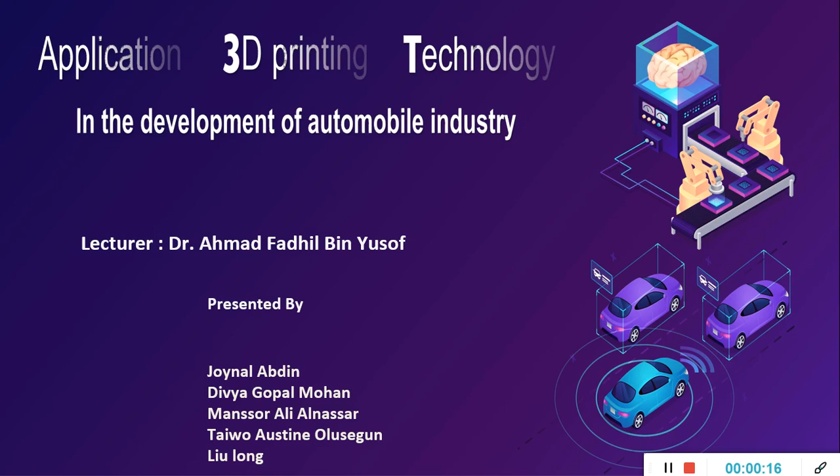Today we are going to present about the application of 3D printing technology in the development of the automotive industry. Contents: what is 3D printing, history of 3D printing, application of 3D printing, future of 3D printing in the automotive industry.

3D printing. Additive manufacturing, known as 3D printing, is a digital manufacturing technology that directly forms three-dimensional complex structures by simply adding material layer by layer in two dimensions. It will have a profound impact on the traditional process, production line, factory model, and industrial chain combination. It is a representative disruptive technology in the manufacturing industry, integrating information network technology, advanced material technology and digital manufacturing technology, and is an important part of the advanced manufacturing industry.

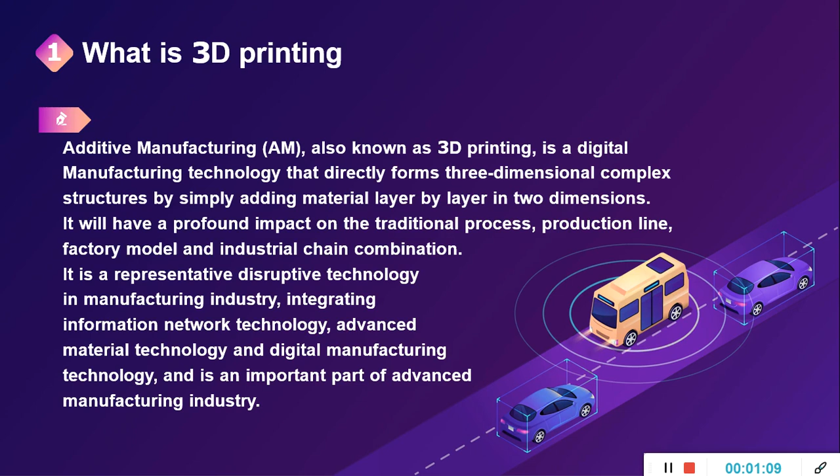The essence of 3D printing is additive manufacturing technology supported by computer aided design, big data, cloud computing, computer aided manufacturing, Internet of Things, virtual reality, and other technologies. 3D objects are directly formed by digitalization or computer models by stacking them layer by layer. To put it simply, 3D printing is a technology that constructs objects by printing materials layer by layer with extremely thin thickness through computer modeling.

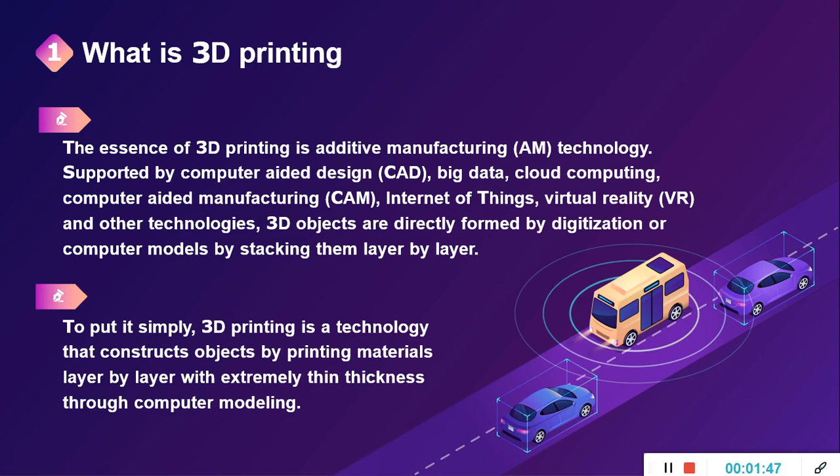History of 3D printing. In 1986, the birth of the 3D printing machine in the United States opened the curtain of the development of 3D printing technology. And in 2010, the world's first 3D printed car, a 6.1 model named Urbee, was unveiled. In 2013, the first prototype Urbee2 was born with more than half of its parts 3D printed. And in 2014, the first 3D printed electric vehicle, the Strati, has just 40 parts and was printed in 44 hours.

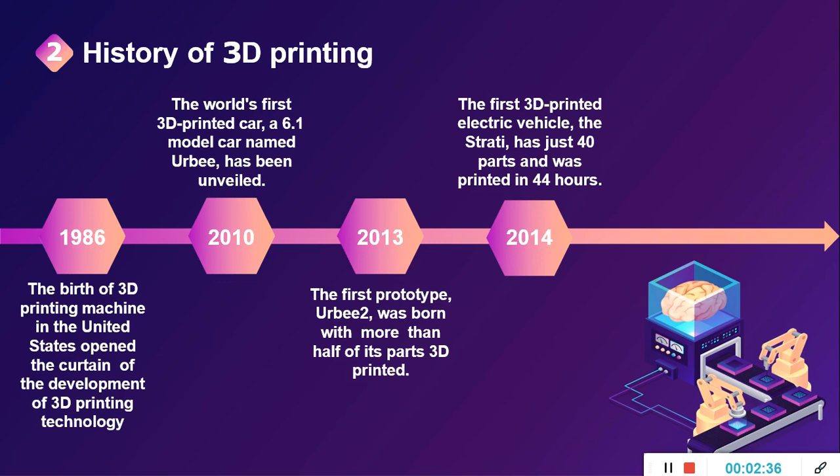And in 2015, US company DM created the world's first 3D printed sports car, the Blade, which uses 3D printed car parts and is then assembled by hand. Here is the picture of the 3D printed Blade car. And in 2016, 7 of the world's biggest car brands unveiled their latest designs as 3D printed concept cars hit the market. XEV designed the world's first mass-produced 3D printed electric car in 2019.

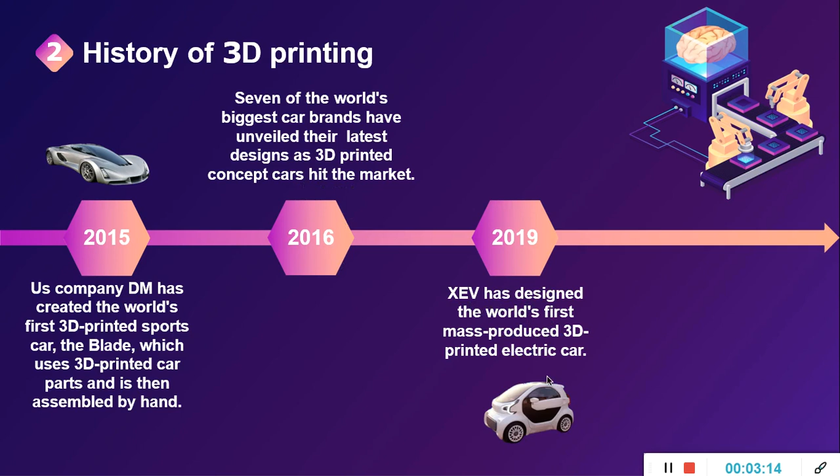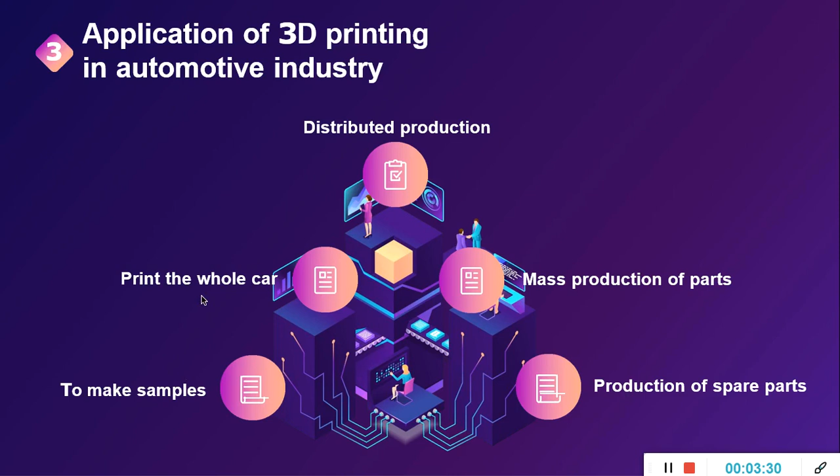Application of 3D printing. Distributed production, mass production of parts, production of spare parts, to make samples, print the whole car. To make samples: from design to final mass production, the research and development of the car requires the production of a large number of samples. Before 3D printing, samples were processed by hand, CNC and other methods.

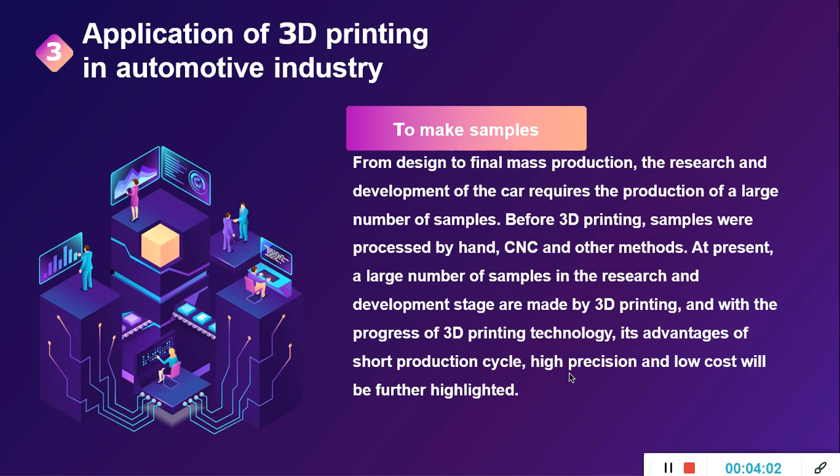At present, a large number of samples in the research and development stage are made by 3D printing, and with the progress of 3D technology, its advantages of short production cycle, high precision, and low cost will be further highlighted.

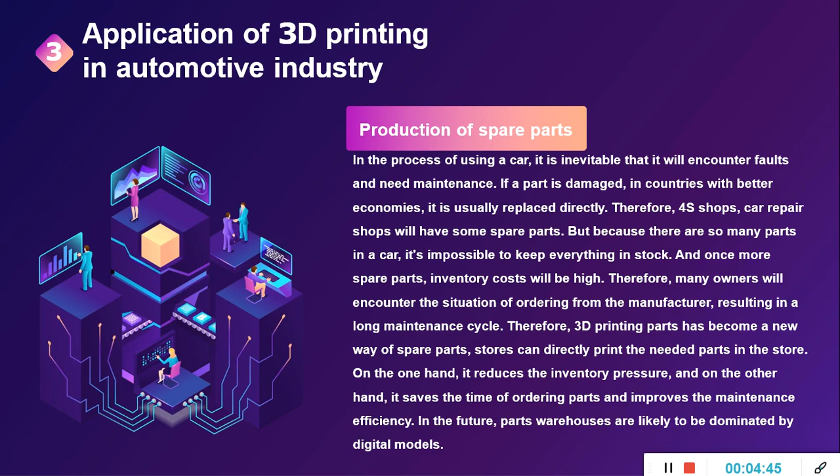Production of spare parts. In the process of using a car, it is unavoidable that it will encounter faults and need maintenance. If a part is damaged in countries with better economies, it will usually be replaced directly. Therefore, car repair shops will have some spare parts. On the other hand, it reduces the inventory pressure, saves the time of ordering parts, and improves the maintenance efficiency. In future, parts warehouses are likely to be dominated by digital models.

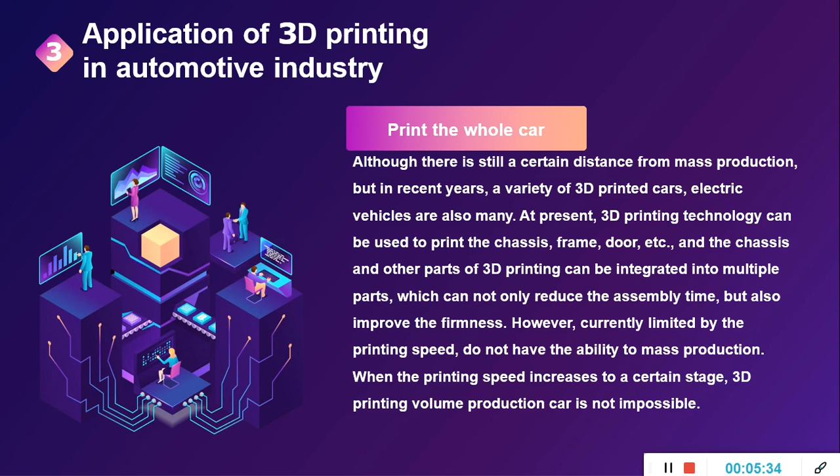Printing the whole car. Although there is still a certain distance from mass production, in recent years there are many 3D printed cars and electric vehicles. At present, 3D printing technology can be used to print the chassis, frame, door, etc., and the chassis and other 3D printed parts can be integrated from multiple parts, which can not only reduce the assembly time but also improve the firmness. However, currently limited by the print speed, it does not have the ability for mass production. When the print speed increases to a certain stage, 3D printing volume production cars is not impossible.

Mass production of parts. 3D printed parts are directly used in production cars. Currently, most of the 3D printed parts are still used as test pieces. This is not to say that the quality of 3D printed parts is not good; it is the printing speed mentioned above, the same.

So, due to the small molding constraints of 3D printing, topologically optimized parts can be made, often with complex geometry, lighter and with better performance than the original parts. At present, manufacturers in the automotive industry are increasing their investment in the research and development of 3D printing technology, expecting to use 3D printing technology to mass produce parts and bring better performance to cars.

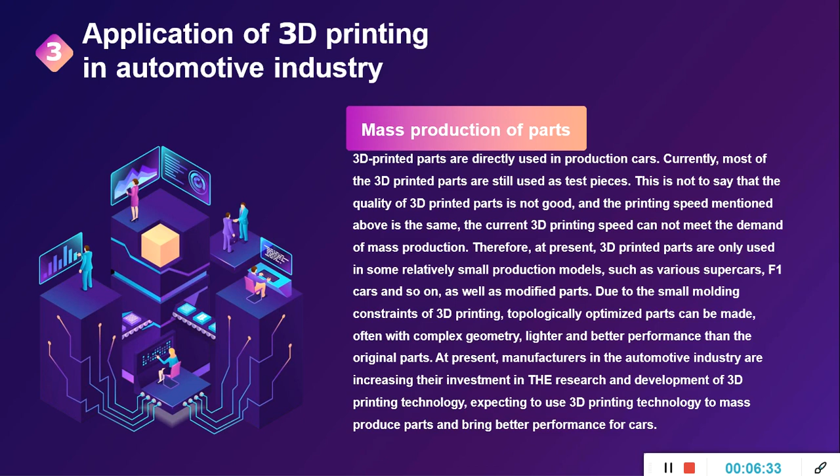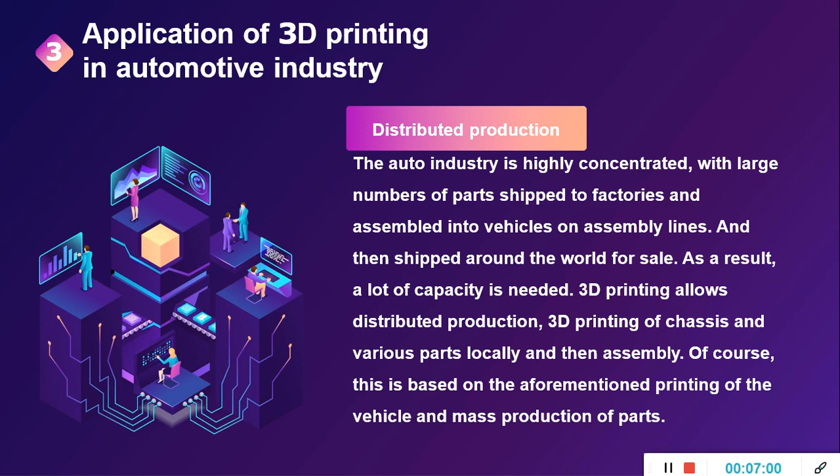Distributed production. The auto industry is highly concentrated, with a large number of parts shipped to factories and assembled into vehicles on assembly lines and then shipped around the world for sale. As a result, a lot of capacity is needed. 3D printing allows distributed production, 3D printing of chassis and various parts locally and then assembly. Of course, this is based on the aforementioned printing of the vehicle and mass production of parts.

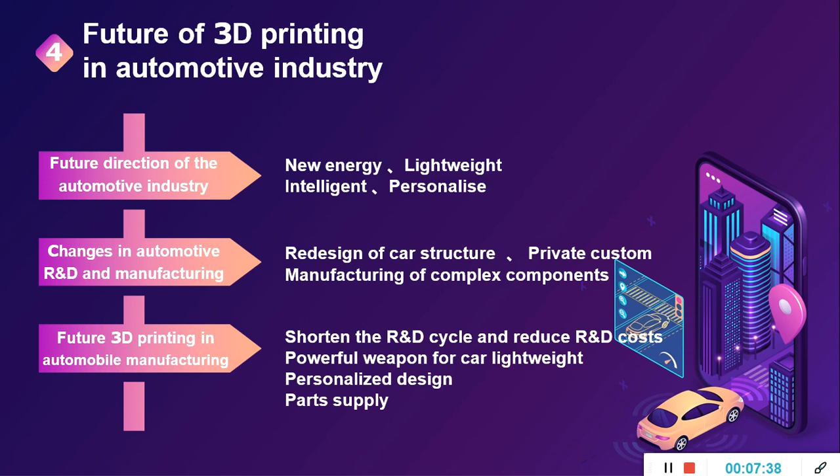Future of 3D printing in the automotive industry. Future direction of the automotive industry: new energy, lightweight, intelligent and personalized. Change in automotive R&D and manufacturing: redesign of car structure, private custom, manufacturing of complex components. Future 3D printing in automobile manufacturing: shorten the R&D cycle, reduce R&D costs, powerful weapon for car lightweight, personalized design, parts supply.

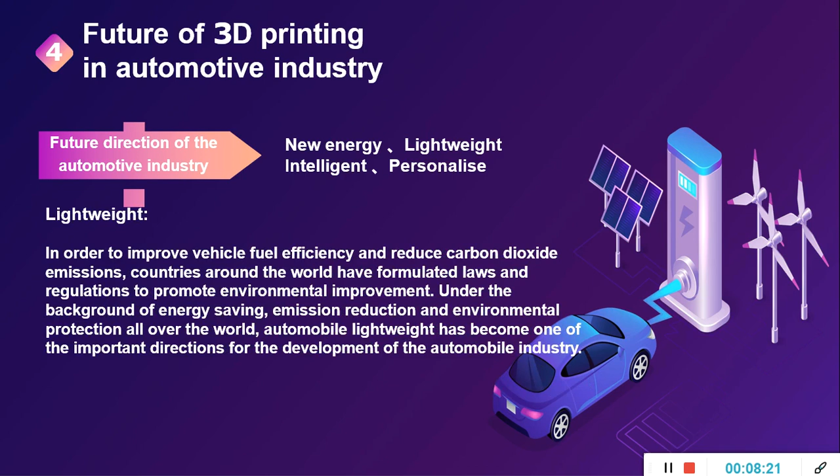So, new energy. In 2019, the World New Energy Vehicle Conference was held in Boao, Hainan. The conference gathered global experts and elites to discuss new energy vehicle innovation, market, industrial transformation, and upgrading. In recent years, the production and sales of new energy vehicles have continued to grow, and pure electric vehicles account for more than 80% of new energy vehicles. Lightweight. In order to improve vehicle fuel efficiency and reduce carbon dioxide emissions, countries around the world have formulated laws and regulations to promote environmental improvement.

Intelligent. The intelligence of the automobile industry can be divided into two aspects: intelligent manufacturing and intelligent driving. Intelligent manufacturing is the development goal of the manufacturing industry, and the automotive industry is no exception. The car of the future may be like a car in a science fiction film: we sit in the car, tell it the destination, and the car will drive and deliver us automatically and safely. Personalized customization highlights the charm of personality, and meeting the individual needs of different consumers will be one of the directions of future automotive development.

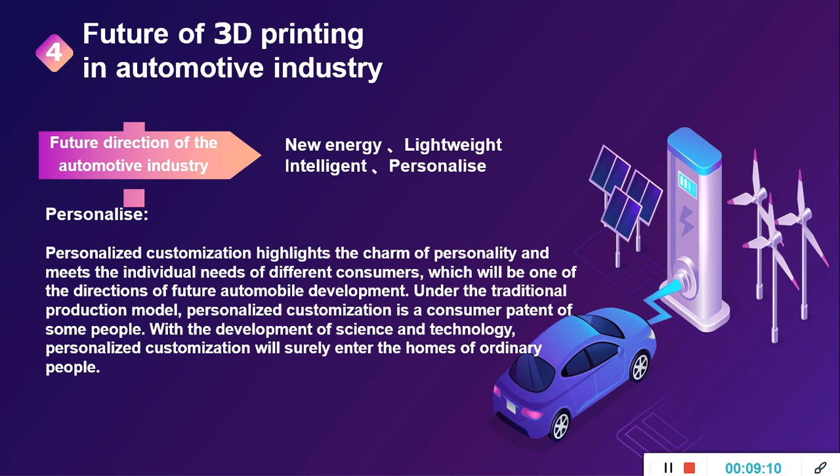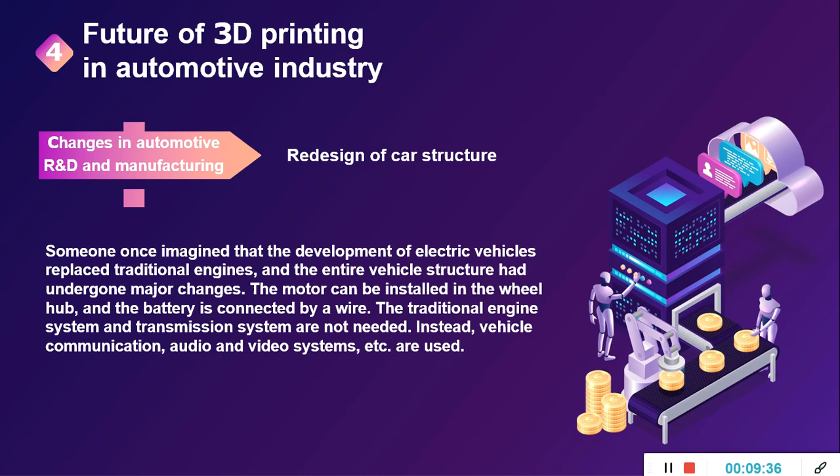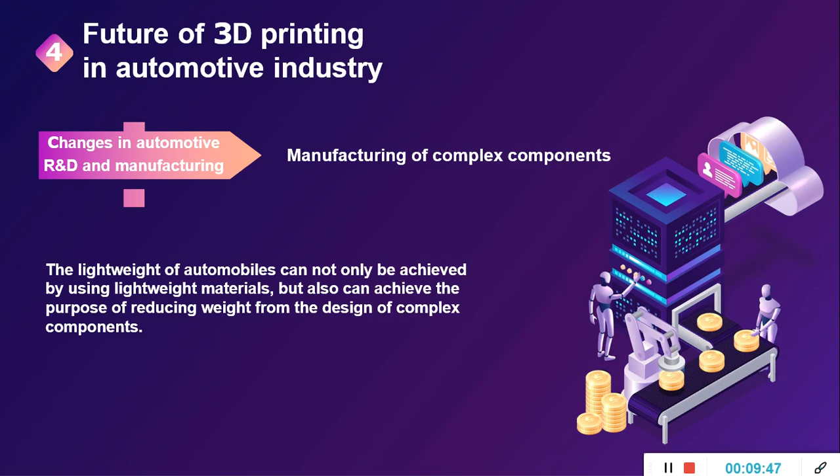Changes in automotive R&D and manufacturing. Redesign the car structure. Someone once imagined that with the development of electric vehicles replacing the traditional engine, the entire vehicle structure would undergo major changes. Instead, vehicle communication, audio and video systems, etc. are used. Manufacturing of complex components. The lightweighting of automobiles can not only be achieved by using lightweight materials but can also achieve the purpose of reducing weight through the design of complex components.

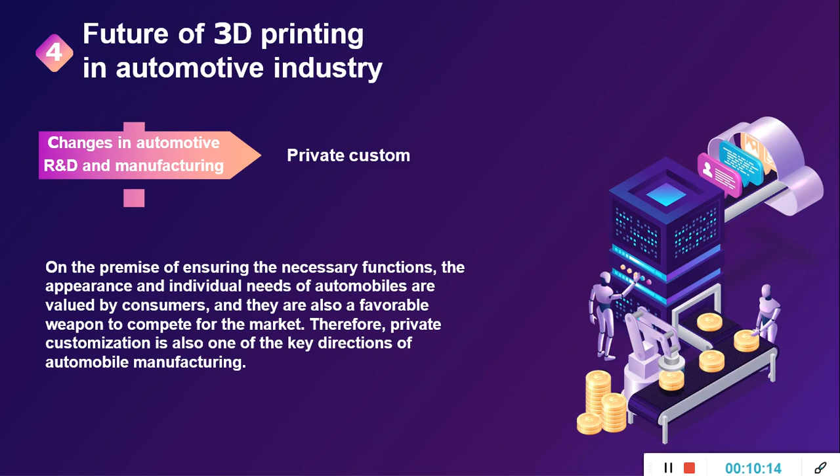Private custom. On the premise of ensuring the necessary functions, the appearance and individual needs of automobiles are valued by consumers, and they are also a favorable weapon to compete for the market. Therefore, private customization is also one of the key directions of automobile manufacturing. Shorten the R&D cycle and reduce the cost. The application of 3D printing in the future automotive research and development stage is not just the trial production of individual parts, but the research and development of the structure and layout of the entire car.

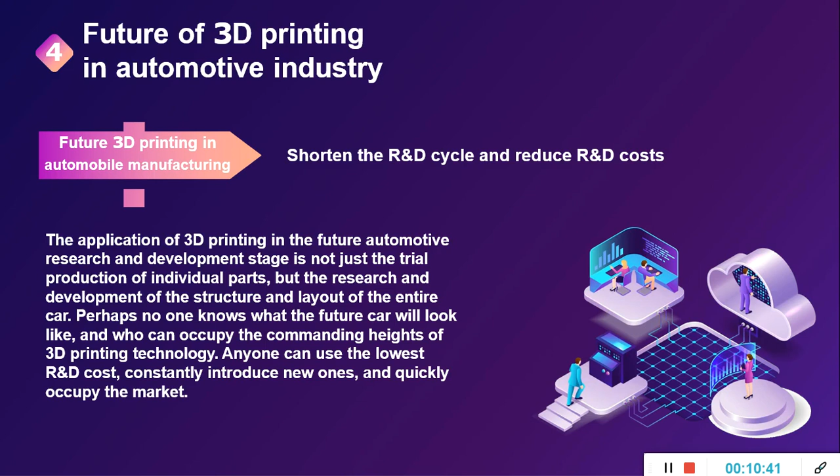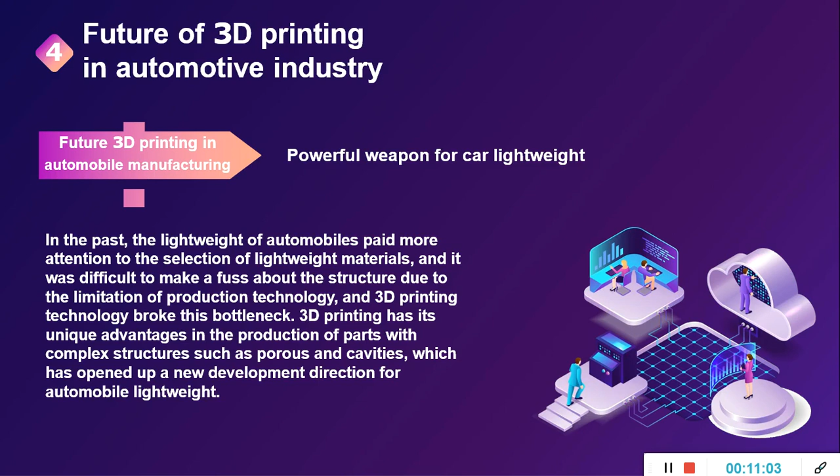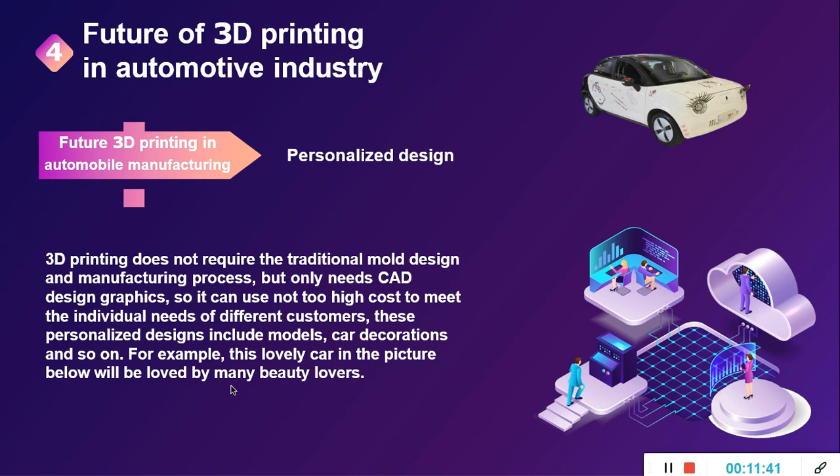Powerful weapon for car lightweight. In the past, the lightweighting of automobiles paid more attention to the selection of lightweight materials, and it was difficult to push the structure due to the limitation of production technology, and 3D printing technology broke the bottleneck. Personalized design. 3D printing doesn't require the traditional mold design and manufacturing process, but only needs CAD design graphics, so it can meet the individual needs of different customers at not too high a cost. This personalized design includes models, car decorations, and so on. For example, this lovely car in the picture on the right side will be loved by many beauty lovers.

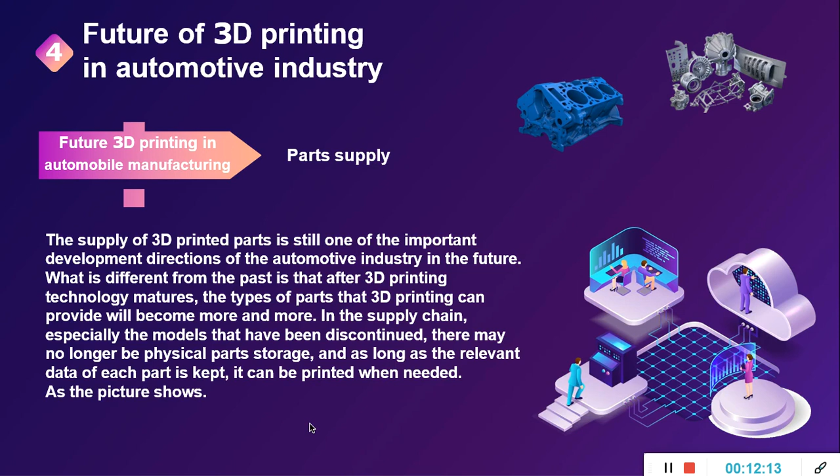And parts supply. The supply of 3D printed parts is still one of the important development directions of the automotive industry in the future. What is different from the past is that after 3D printing technology matures, the types of parts that 3D printing can provide will become more and more in the supply chain, especially for models that have been discontinued, and there may no longer be physical part storage.